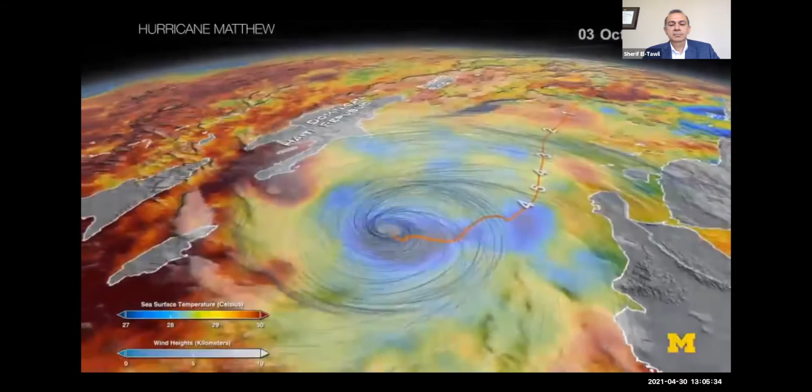Adaptation is a necessary thing for survival. We're dealing with many things that are affecting our life. Climate change is essentially raising sea levels, and that's going to affect coastal communities. It will cause more severe storms, more severe hurricanes, and tornadoes that are becoming increasingly frequent and increasingly destructive. We are looking at how extreme events like hurricanes and earthquakes affect communities, and how these communities can recover quickly from these different types of events.

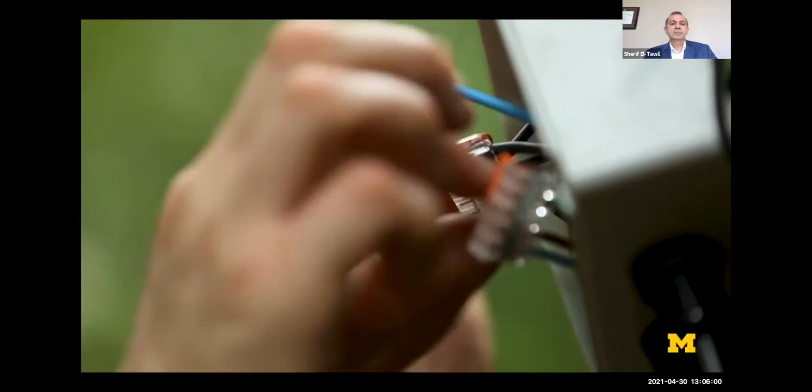My colleague Evgeny Filipov is looking at how origami can help us design structures that change shape, that respond to various types of hazards as they occur. My colleague Valery Ivanov is looking in the Amazon at how trees interact together and how they grow within that environment. My work is focused a lot on earthquake engineering. If we do not build our structures to be resistant to earthquakes, we are going to get structures that would fail in a catastrophic manner.

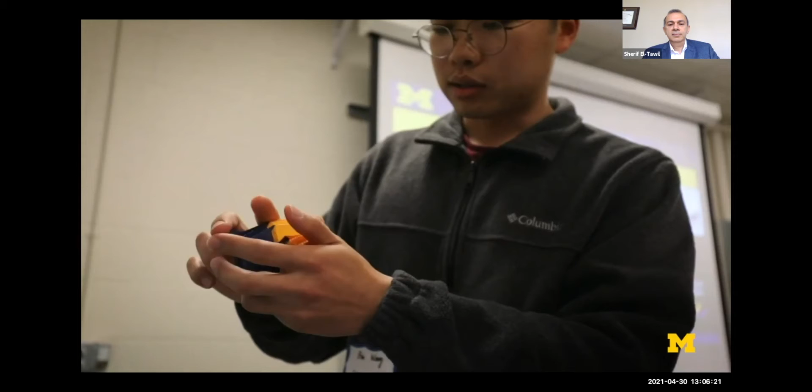We will always be adapting to new stressors that will appear on the horizon. We just don't know what they are yet. Through human ingenuity, we will always be able to adapt to whatever situation exists.

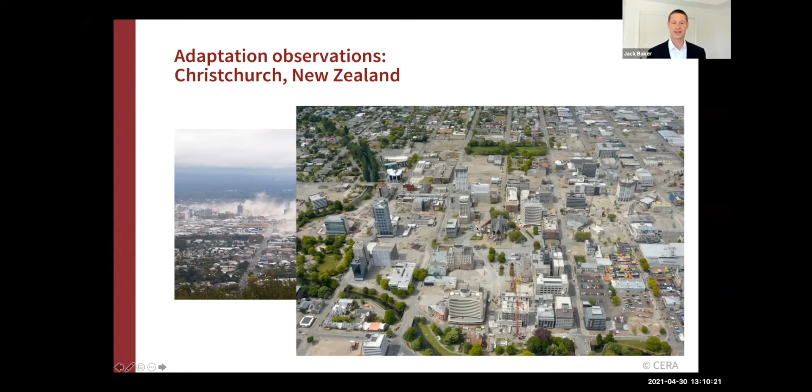The buried infrastructure was really severely damaged, and there was a lot of subsidence in the area - some areas were actually below sea level afterward. As there was repeated liquefaction in a series of earthquakes, it was deemed that this area was not safely inhabitable anymore. The flood risk was too high, the liquefaction problems too severe, and ultimately 10,000 people were relocated out of this area, with tremendous disruption. I think this is a harbinger of what we're going to see with sea level rise and managed retreat - a very painful and disruptive process.

Interestingly, when that subdivision was built, none of this was foreseen. There was no consideration of severe flood risk in the future. The liquefaction problem was not on people's radar. It wasn't deemed a very high seismic risk area. So a built environment was built under a set of assumptions that no longer held, and we faced the need for adaptation. Again, I think this is illustrative of the type of challenges we're going to face moving forward.

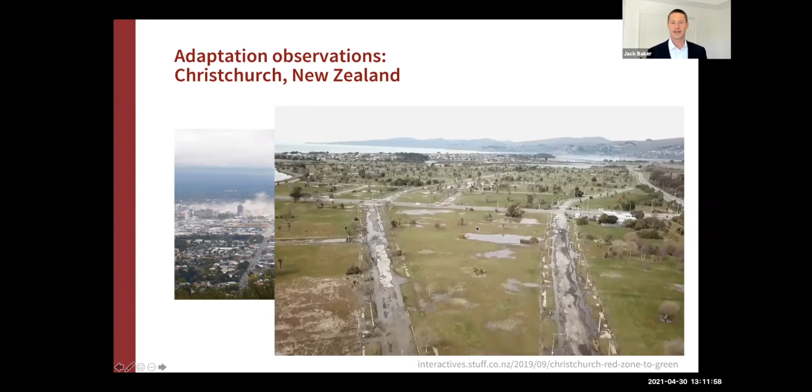And of course, this problem is only going to get worse with each passing year. So we have a flood risk problem now with a tremendous amount of assets right behind the seawall. Additionally, because this land is artificial fill, it's very susceptible to lateral spreading in earthquakes, and indeed it's experienced lateral spreading.

It's the same artificial fill, except now there's billions of dollars of buried infrastructure in that waterfront, and billions of dollars of buildings sitting right behind it. So the city faces this challenge of present risk of earthquake damage to the seawall, and this growing risk over time of floods due to sea level rise. Ultimately, it's in the planning process of what's going to be probably a $5 billion project to retrofit and raise this seawall and improve its safety.

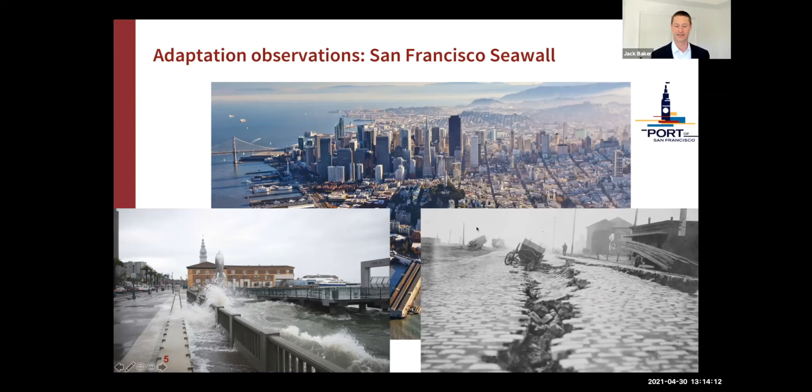And we're designing for a future that doesn't look like the past, right? Again, a harbinger of what we're going to face as a profession. So with that as background and specific examples illustrative of situations we face around the world and will increasingly face, I want to talk today about two challenges related to adaptation.

One is, how do we design for resilience? Our profession has a long and distinguished record of designing for safety and keeping occupants of our buildings safe in extreme events and normal operations, and I think we should be quite proud of that. But increasingly that bar is moving, and we need to think about other performance objectives.

And then the second is, how do we design for a future that doesn't look like the past? That really throws some of the paradigms we've used in our profession into question, and we need to develop some new tools to address that. So I'd like to talk briefly about both of those topics.

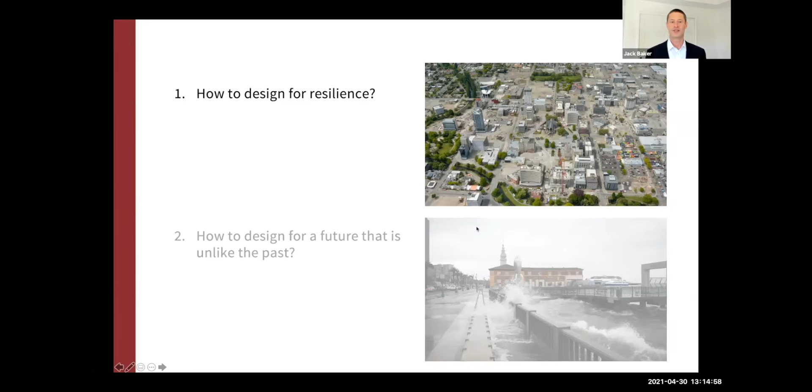First, let's talk about resilience. And I think if we want to think about where to go, we should think about where we are now. So I like to go to the ASCE 7-16 standard - an important standard that drives a lot of our design and analysis procedures for buildings and other elements of the built environment. If we look at the performance goals in there and look at the commentary, I took some of the text out, and it's on the slide here to the left.

It says these standards and performance objectives were intended to provide protection against structural failure - it's structural failure, safety of occupants, that is primary in our goals as civil and structural engineers. The commentary goes on to say we would like to provide economic protection, we'd like to improve the probability that critical facilities will be functional after small and moderate events. But there is no documentation of the reliability intended with respect to these goals - they're aspirations, but they're not goals that have been calibrated or addressed explicitly in our design codes right now.

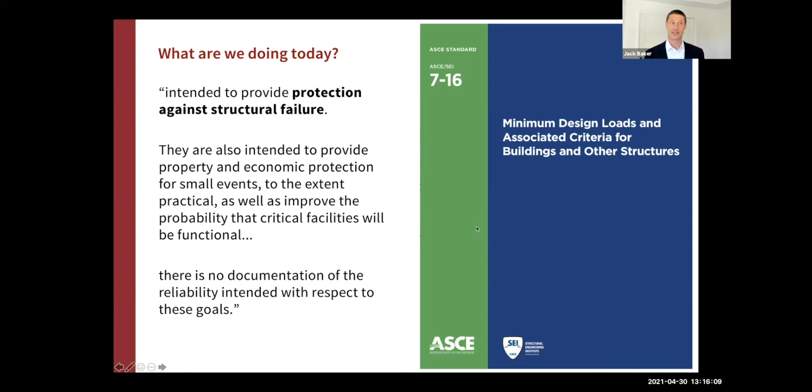I think that objective is changing, and we're shifting towards a more explicit targeting of reliability and performance. And I think that's going to really continue to be an important part of our profession.

To give a couple examples of how that's happening: one really pioneering effort, and one that influenced me personally, was from the San Francisco Planning and Urban Research Association about a decade ago. I'll note that this was led by Chris Poland, our panelist, joining in a few minutes. I had this slide in the presentation even before I knew Chris was the panelist, so I'm very pleased with your wisdom in selecting him to come here today.

This was really a critical effort in getting together stakeholders in the city to look at a variety of functions in society, from critical infrastructure systems to businesses, to residences, and all the activities that take place in the community, and to say: after an earthquake, and more generally after a disaster, when do we need these services back at various levels of functionality?

Setting kind of target resilience objectives, there was an effort to assess where our community is at currently. And when there are gaps between what we want in terms of resilience and what we think we have right now, we need to look at policies and actions to close those gaps. So this was a really critical framing of this problem: how are we going to set objectives, and how are we going to go about trying to meet these resilience objectives?

So in the decade plus since this report came out, lots has happened.

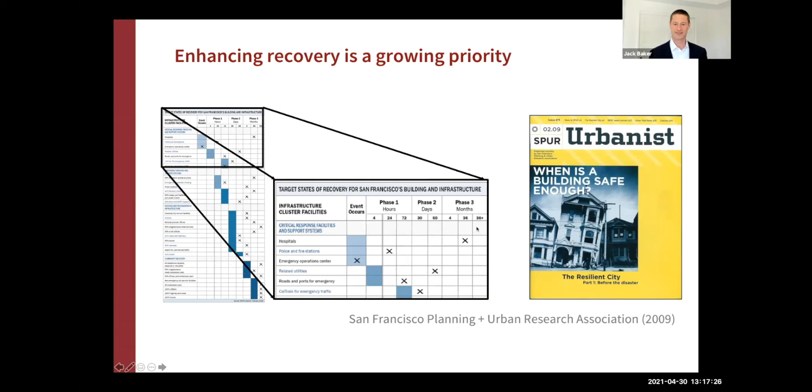I could give a full talk, and others might be better than me at giving a full talk just about all this resilience activity that's going on. I think it's really exciting, and there's going to be a lot happening in coming years as well. But I'm going to talk a little bit about how some of our research tries to contribute to this, and where we might be going as a profession.

To me, and with my own work, I think there are two critical tools that help us solve these problems of getting to more resilient communities. One is thinking about regional recovery.

Here's kind of a paradigm shift from thinking about buildings as islands. When we think about the safety of a building, we can generally treat that building as a self-contained unit. When we think about recovery, we have to look beyond the building envelope to the infrastructure services being provided to that building, to the broader economic and social context that building sits in, and what services a building or built asset is intended to provide to a community.

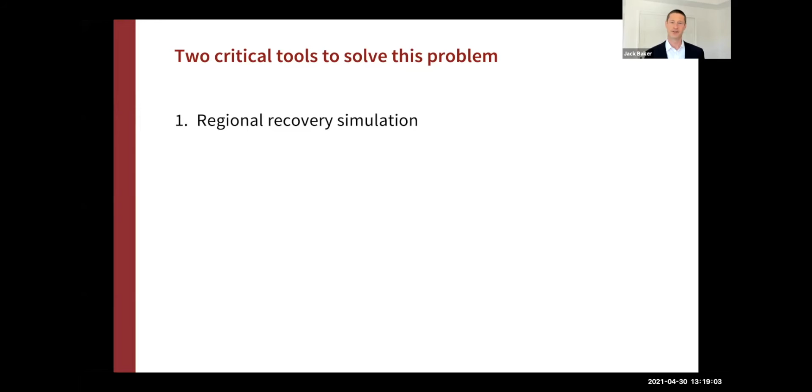So we have to put that all together in a regional simulation and think about the recovery of those services over time after a disaster.

The second tool that I think is really compelling here are performance-based engineering standards. This is thinking about specific performance targets and objectives we're trying to achieve with our engineered systems, then assessing that performance and designing systems to achieve those performance levels. I think that's really critical as we think about a broader set of performance objectives.

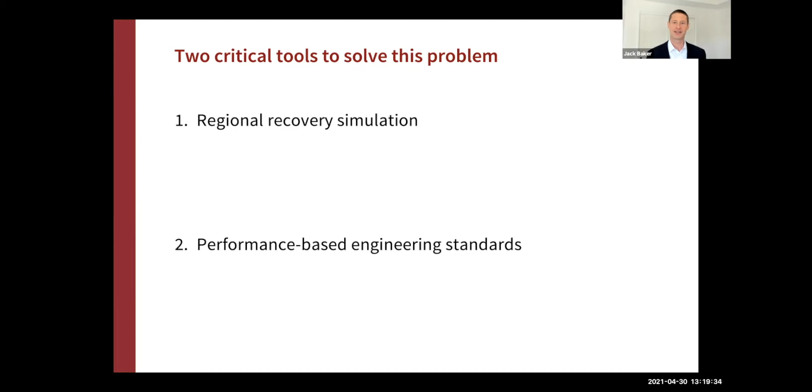And it's increasingly feasible to use these tools at the city scale, the regional scale. So I'm going to talk about a couple of details of this and a couple of examples.

When we think about these regional recovery simulations and performance-based assessments, we go through the following assessment procedure: we think about a disaster or disruptive scenario. For my group, it's oftentimes earthquakes, but lots of this thinking applies in other contexts. If we have an earthquake, that earthquake produces ground shaking throughout a region, and it's the ground shaking that oftentimes drives a lot of the damage to the built environment.

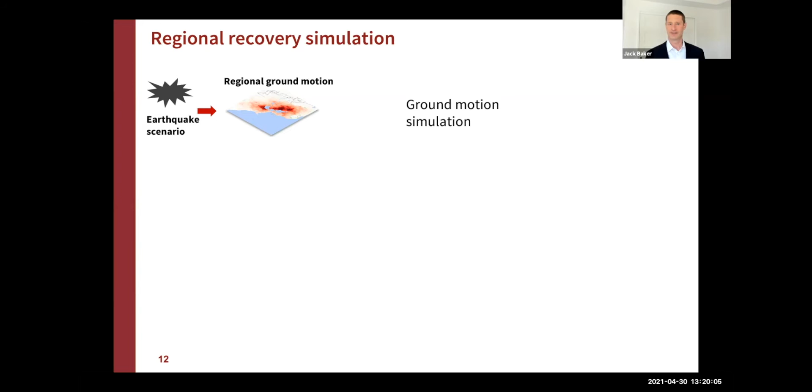So we think about simulating the ground motion throughout a region, and it's going to vary throughout the region that we're interested in. Then for each asset that's in that region, buildings or infrastructure components or other types of built assets, we're going to think about the damage to those assets due to the ground shaking or other mechanisms.

And then we're going to use these performance-based standards to try to think about the consequences in terms of not just safety, but also costs to repair, and then importantly, time to recover and time to restore functionality. Then we can take those metrics for the individual buildings, bring it to the regional level, and look at what does that mean in terms of the economic sector impacts and recovery.

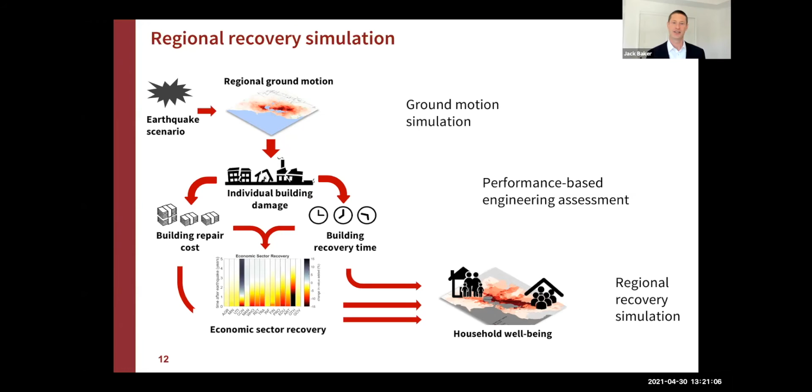So how are we losing services, and ultimately looking at individual households. How does the loss of housing impact households? How does the economic disruption impact households in terms of lost income or employment, and how does all this come back online over time, and what does that mean in terms of the well-being of those households? And so we can put this all together in a modeling framework and try to understand and then adapt our systems for better performance.

So taking the middle slice of that figure, I want to talk for just a minute about performance-based engineering assessment. And here we lean very heavily on FEMA P58. This is a procedure first published almost a decade ago, building on a decade or so of prior work. And it's increasingly being used in the practice of earthquake engineering on the West Coast of the US especially, but internationally.

And the general idea is we start with a ground shaking amplitude, and then we do the classic structural engineering work that we're very good at, thinking about structural responses for a building that we're studying. And this is drifts, displacements, accelerations throughout the building.

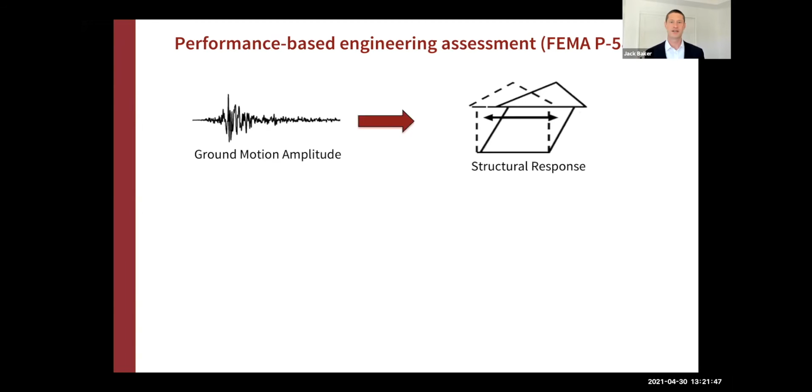But then we continue beyond that structural response to look at damage to individual components. So this is both structural components, the core of the structure that we're responsible for as engineers, as well as non-structural components, the mechanical equipment, the finishes, and other components of the building that could be damaged.

And then we assess that full set of damage, and then we go on to our performance metrics, and we say, how much is it going to cost to repair all of that damage? How long is it going to take to reoccupy the building as we're working through the repair process? What is the recovery process going to look like? And so that's the general framing of this problem.

And as I said, this is used increasingly for individual buildings. So new buildings are being designed using these types of procedures and try to iterate the design in order to limit damage to components and prevent closures and downtime. And this is a detailed study of individual buildings taking hours of time.

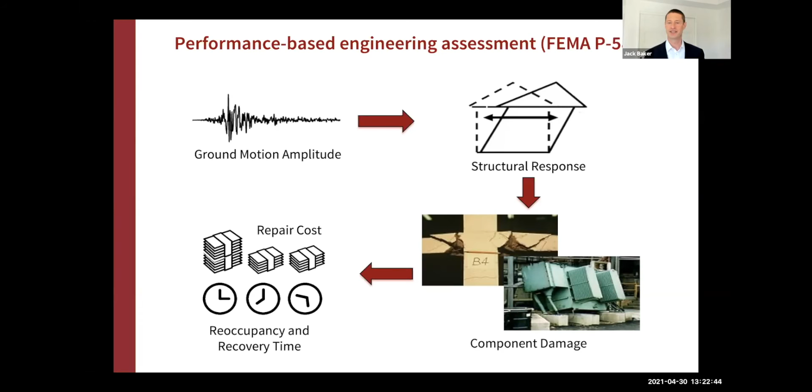But increasingly, we're also using this at the city scale. So if this kind of work on the slide here is the work for an individual building in this assessment procedure, rather than building a detailed model building by building of each component, we're taking a city-level inventory of more basic characteristics and saying for each building in the region, how old is it? How big is it? What's its occupancy type?

And then we're using that to infer the characteristics of the building, right? If we know its age, we can estimate the design standards that were used to design the building. If we know its occupancy type, we can estimate the contents that are inside the building and the components that could be damaged. And so we can automate that.

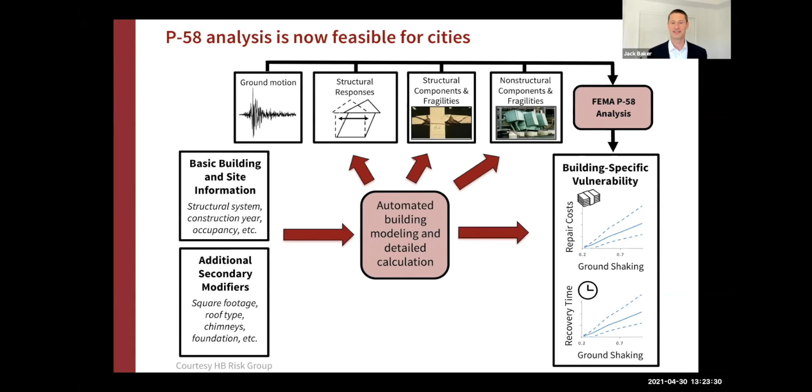And then we can run, high performance computing makes it easy to run these simulations for thousands of buildings now. And we can get to these kind of outputs in terms of repair costs and recovery time on a building by building scale that we can feed into regional recovery models.

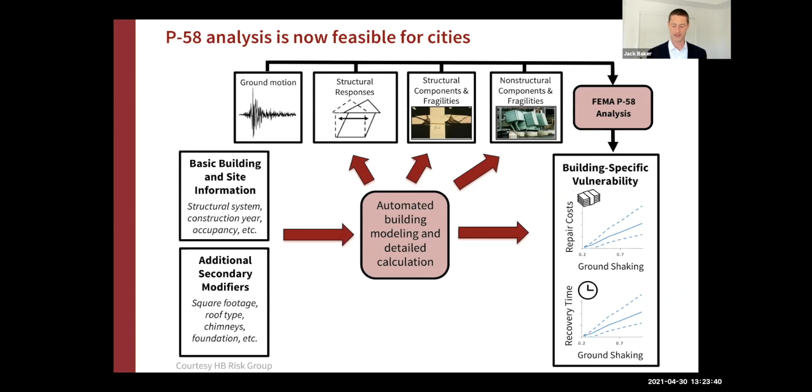And an example of that type of work, this is done by Anne Hulsey, a former student at Stanford, with my colleague Greg Deierlein. And we were looking at San Francisco. San Francisco was worried about this cordon issue that I mentioned from my Christchurch motivation, where safety issues might cause us to close down access to parts of a city. And there's a number of tall buildings in San Francisco that are older, pre-Northridge steel moment frame buildings. And we know they're vulnerable to particular types of damage.

After an earthquake, the city is worried that damage to tall buildings might cause safety cordons that would make otherwise safe buildings in the downtown region inaccessible for some period of time. So what Ann did is build a model of the Central Business District of San Francisco.

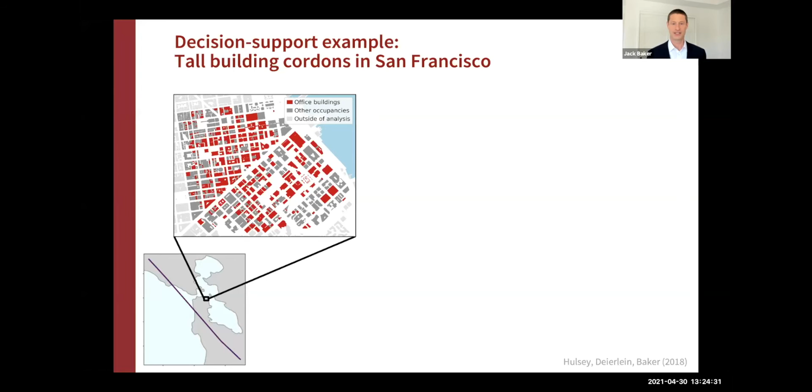She ran this FEMA P58 assessment for the entire downtown region, then went to the regional recovery simulation phase. She took all the buildings in the area, assessed their damage and downtime, paying special attention to tall buildings and refining the modeling on them. If those tall buildings had damage deemed a safety risk, we'd trigger a cordon in the simulation where surrounding buildings would have restricted access, making them inaccessible for some period even if undamaged.

We can take the full downtown as a whole and look at various points in time after the earthquake: how many buildings are in the process of being repaired and might not be accessible, how many buildings are waiting on the commencement of repairs (we call these impeding factors), and how many buildings are inside a safety cordon and inaccessible. We can count the amount of office space available over time and how the recovery happens. This helps us understand the potential drivers of closure in a future earthquake.

It also helps us measure the benefits of mitigation actions. If we have preparations ahead of time for inspection and planning around those cordons, can we speed up this recovery process? If we required retrofits of various types on these tall buildings, how much difference would that make in terms of this resilience assessment? This ability to interrogate and understand the benefits of adaptation is really critical in this type of analysis and pretty exciting.

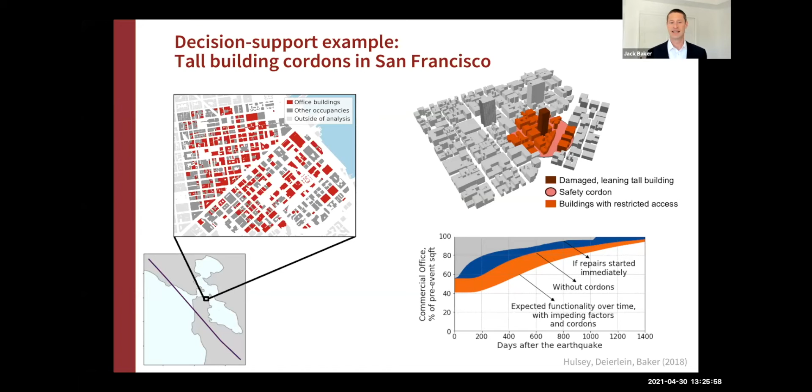A second example of this type of analysis, now looking out to the broader San Francisco Bay Area. The map on the left shows the broader Bay Area with a population of about 8 million people. This is work by a former student, Maryia Markhvida, and some colleagues at the World Bank who helped with the economic modeling.

We similarly simulated damage to built assets throughout the region, then looked at what that meant in terms of economic losses, loss of production by firms, and what that meant for households that either lost housing or lost employment due to the economic disruption. We looked at their household consumption changes due to this disruption.

This was for a simulation of an earthquake on the east side of the bay. I'll run this video through in a couple stops, stepping through in time. We have an earthquake occurring, and all of this red indicates lost consumption, so economic hardship for households. Then, over a period of years, this comes back as the reconstruction happens and the economic activity picks back up again.

I'll pause here, maybe 4 years afterward in the simulation. We're getting to blue colors in the map, indicating some areas have actually surpassed their prior consumption in this process, but there are still patches of red. Those patches are in areas that were very strongly shaken in the scenario, right underneath where the earthquake occurred, but they also had various levels of economic limitations—tending to be lower income or less economically vital parts of the region. So we can couple the economic aspects of the community with the physical aspects.

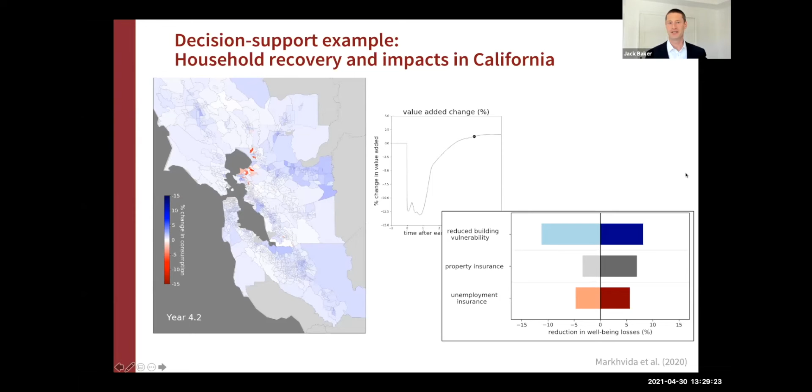So this is a kind of pilot demonstration of that decision making, but I think increasingly we're going to be asked to help support those types of decisions with communities trying to increase their resilience.

These simulations I think are exciting as an academic, but they're layered up of many assumptions throughout our models. To understand what needs to be in those models, and to try to validate them, I think we also need to look at empirical data. So I want to talk briefly about a couple examples of that.

This is an example looking empirically at recovery data. Sabine Loos, a student at Stanford, is looking at survey data following a very destructive earthquake in Nepal in 2015, looking at households who suffered building damage and whether they've been able to reconstruct and reoccupy their homes in the five years following the earthquake.

So she has these surveyed outcomes for the families, and she's looking at what are the drivers of recovery or non-recovery. She's got demographic information on households and regions of the country, and remote sensing data of various types, and did statistical analysis to try to understand what's predictive.

She found the initial shaking intensity was strongly predictive, as we might expect, but also things like the population density around the household, how far it is from urban regions, how remote it is, how much landslide hazard is nearby. Households on steep hill slopes have different recovery outcomes.

So it points to the complexity of the recovery process we need to think about when trying to understand and predict recovery. It's also going to help, hopefully in future disasters, aid agencies more effectively direct their aid, not just thinking about the initial damage, but about the potential for households to recover and what could be done to speed that recovery or make it more effective.

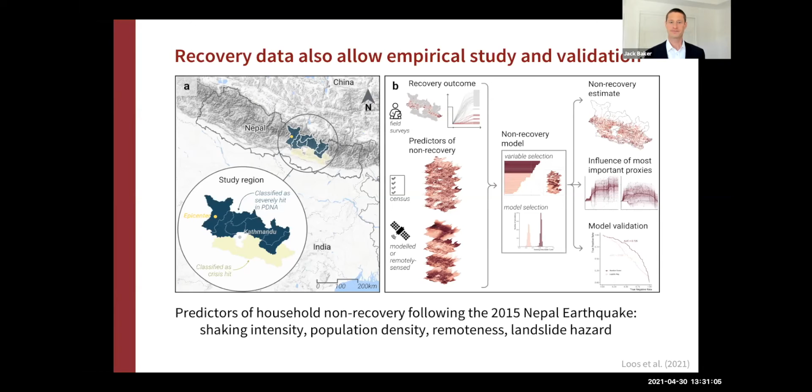We did similar things in Christchurch, working with Erica Seville, an academic in the area, who had done surveys of businesses in Christchurch and their disruption, looking at the drivers of disruption. It was not just buildings being damaged, but also loss of utility services, and some businesses were located in that safety cordon and were disrupted because of that.

Some had no physical damage, but had loss of suppliers, they weren't able to get inputs that they needed for their businesses. Trying to understand those details through empirical study will help us further refine our models and hopefully validate our predictions as well.

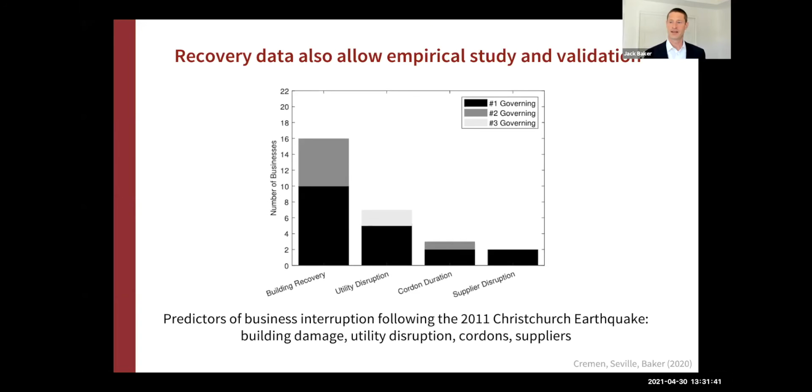Okay, so those are some thoughts about designing for resilience. I want to speak briefly for a few minutes about designing for a future that's unlike the past. I think this is another critical part of adaptation.

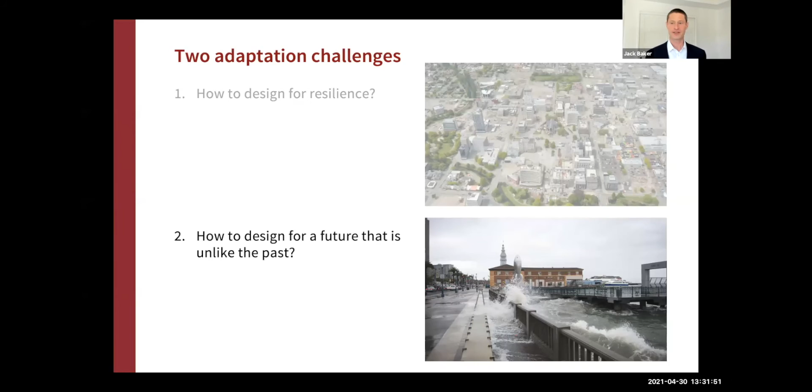I'll show a couple slides from Jack Hogan, a former student at Stanford who's now at Arup, and has some great insights about flood risk. This is a slide he put together thinking about flood risk management.

When we think about flood protection systems like the San Francisco seawall, the traditional approach has been to identify something like a 100-year flood level and then put some amount of freeboard above that, and that's how you pick the height of your flood protection system.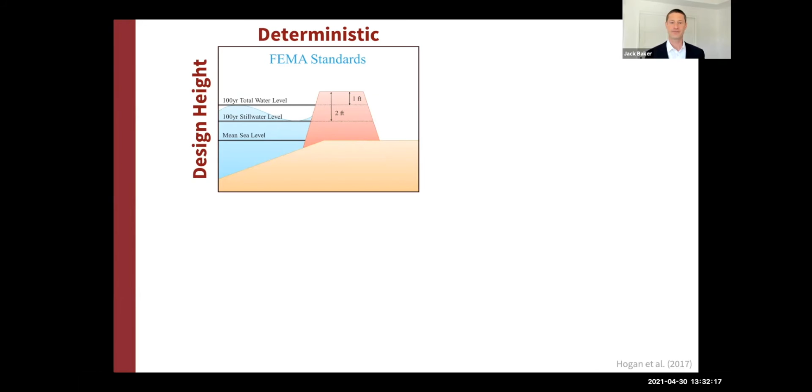If we go to a more probabilistic framing of the problem, we can say higher seawalls or more aggressive flood protection systems will cost more upfront, but will reduce the probability of failure and reduce the losses associated with future failures. So we can think about an optimization where we optimize the total cost, both the upfront cost of the system as well as the losses avoided.

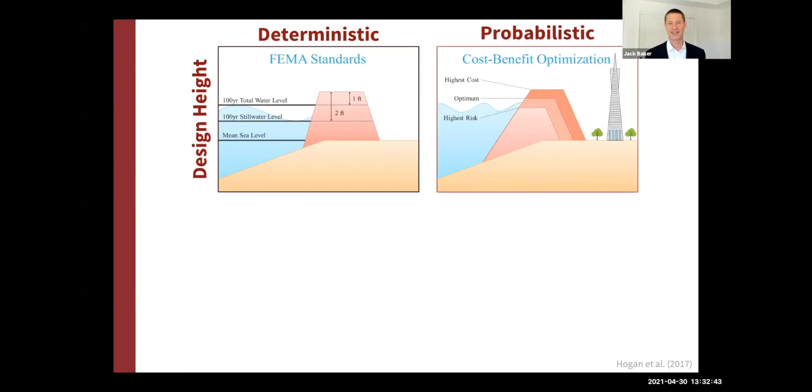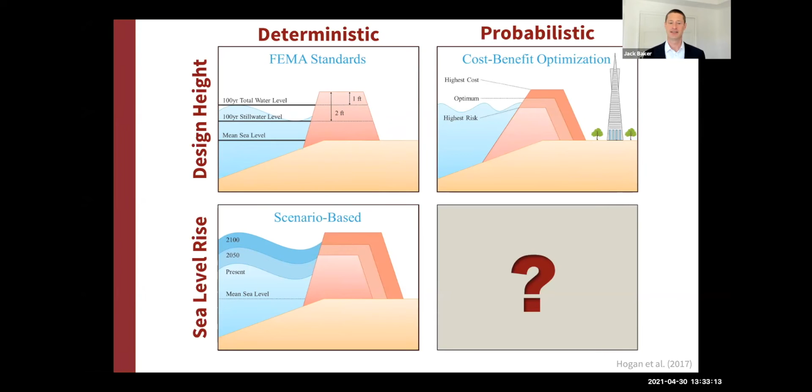When we bring in sea level rise, things get more complicated. Commonly today, we think about a scenario-based assessment where we say, what's a sea level rise projection in 50 years or 100 years, and let's pick that sea level rise and put freeboard on top of it. Or let's just pick 36-inch sea level rise and put some freeboard on top. We'll design for that. But that misses out on these kinds of uncertainties. So the question is, how can we bring in the uncertainties associated with this analysis and the sea level rise change we have to consider?

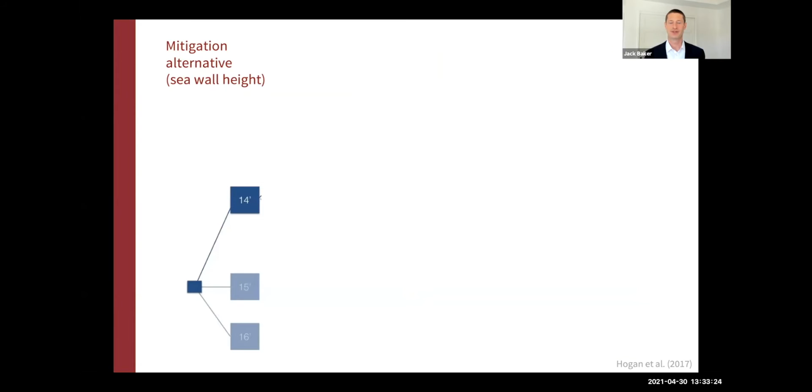The way we thought about this for the San Francisco seawall was to first think about a variety of mitigation alternatives. For the seawall, that meant the height of the seawall. Then for a given mitigation alternative, we want to assess the potential consequences. First, we think about uncertain greenhouse gas emission scenarios, since we don't know what the future atmosphere will look like or how it will drive climate change. We can think about a range of scenarios with probabilities assigned through judgment.

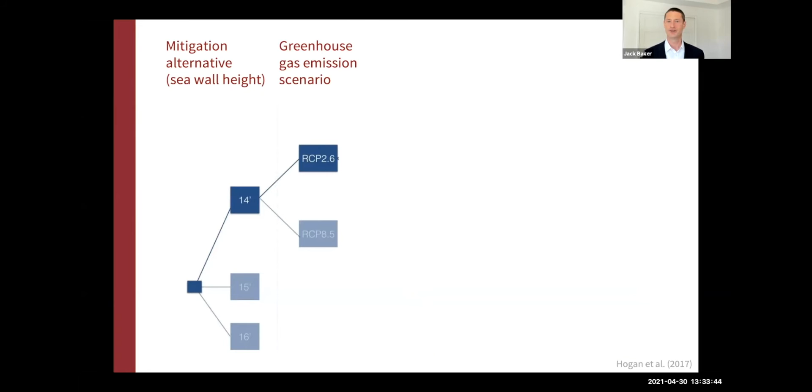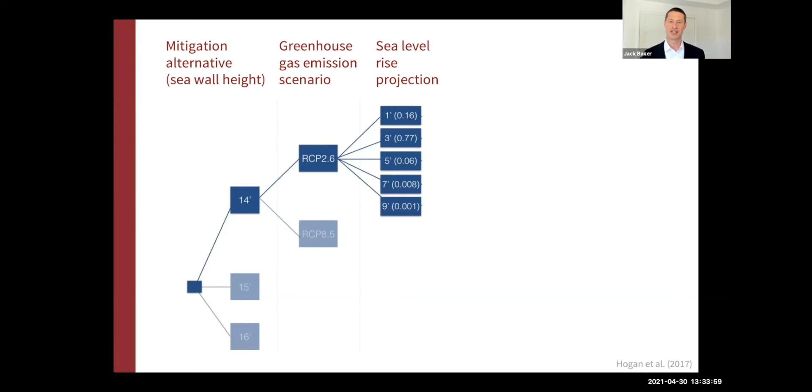For a given emission scenario, we can think about a sea level rise projection over the time frame we're interested in. That's an uncertain projection, so we can put a range of heights with probabilities on it. Then for a given sea level rise projection, we can run forward simulations and think year by year about the probability of overtopping the system due to floods, and what the economic consequences of that overtopping, or some other consequence metric, would be.

We can then think out over the lifetime of the system about the net present value of the consequences as well as the cost of building the seawall. That's going to change over time as sea level rises, but we can also discount future losses. Taking all of this together, we can look at expected costs for a given mitigation alternative and try to select among alternatives based on these performance metrics.

This is much more complex than our traditional way of thinking about designing for extreme events, but we have these tools. This isn't a revolutionary set of tools, but I think these are the types of tools we're going to have to put together to think about future consequences.

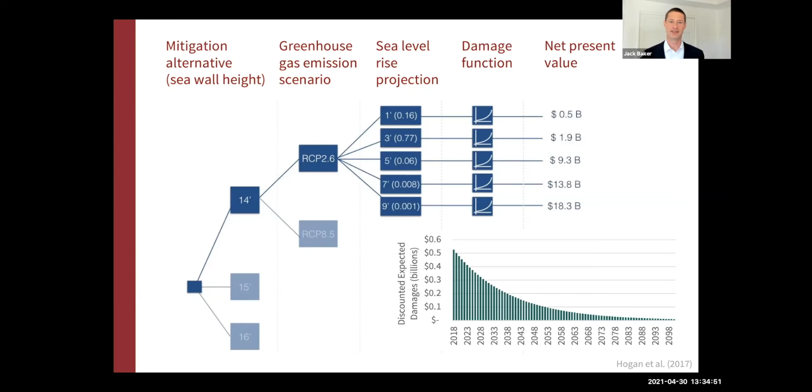Then we've got the hydrologic modeling part, where we get to inundations throughout the region. And if we've got exposed assets, we can look at how deep the inundation is at the location of those assets and what that means in terms of losses. Again, the value of this performance-based framing is we can think about losses with whatever metric we want, and we can think about an uncertain future in this framing as well.

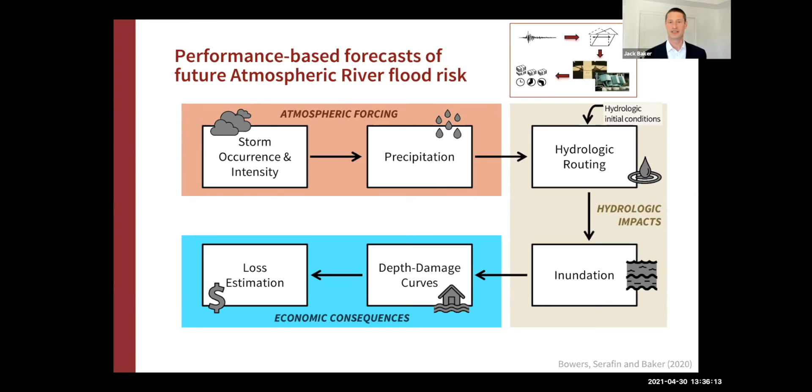Okay, so I'd like to start wrapping up now. A few big picture takeaways: I think the need for adaptation is driving a lot of transformations in the practice of civil and environmental engineering. The ways we've been thinking about our designs are changing.

We need to think about recovery and resilience. We need to think about a changing future, and that has to be a core part of our engineering analysis and design.

I think the hopeful part of that problem is that we are building the tools that can address these challenges, and I think we'll play an important role in society in trying to deal with them. They're very interdisciplinary problems. I don't want to say that only engineers are going to solve these problems. These community recovery processes are much more complicated than that. But I do think we'll play a central role in the story, and we need to be ready to step up to that role, and offer the solutions that only engineers can offer within a broader team of experts. I'm going to slide forward for just a second and put this slide up here.